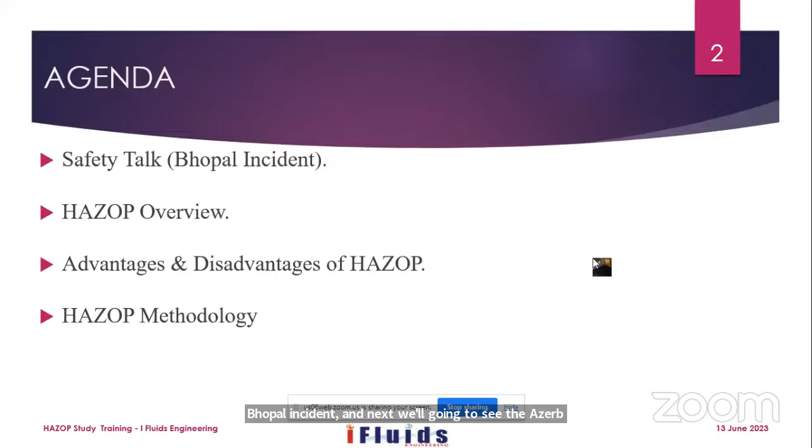Today we are going to start the Hazop session. This is the agenda for today's session. First, we will discuss the safety talk about the Bhopal incident, and next we're going to see the Hazop overview, then advantages and disadvantages of the Hazop study, and finally the Hazop methodology.

Why do we say batch process and continuous process? In the batch process for the food industry, take one reactor, say 5 meter cube or 10 meter cube, that comes under fermentation and distillation process, and it will take some time, 24 hours or 44 hours, to keep it for fermentation before preparing the next batch. So for the food industry and pharma industry, we can say it is a batch process.

For oil and gas, we take oil from the well and it is processed continuously. So these two industries, oil and gas and power plant, we can say are continuous processes. This is the main difference between batch process and continuous process.

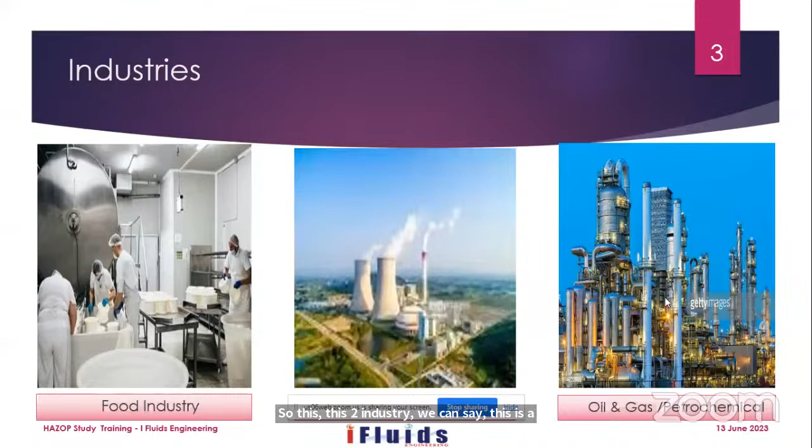This is the Bhopal incident. Hope everyone has heard about it. This is a major incident which occurred in India. The incident involved a methyl isocyanate storage tank temperature runaway. This incident occurred in Union Carbide industry. The incident type is toxic gas release, and it occurred on 3rd December 1984 in Bhopal, India.

Due to this, major fatalities occurred, around 2153, though it's not an exact value, and more than 2 lakh injuries occurred. If you want to see videos, you can search YouTube for Bhopal gas disaster afterwards; there are 3 videos you can see.

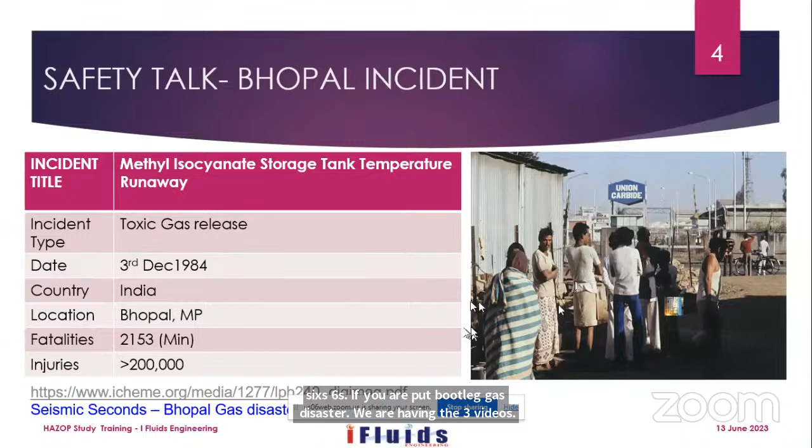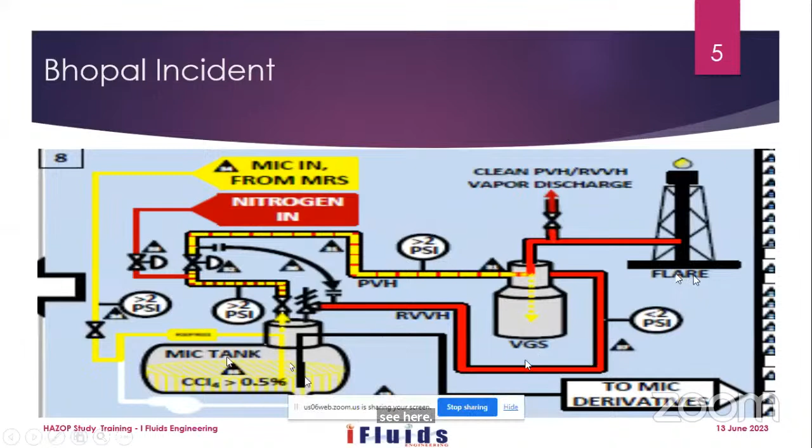This is the MIC storage tank. I will explain what happened. Carbaryl was being manufactured by reacting methylamine with phosgene to make the methyl isocyanate.

Actually, that methyl isocyanate is the intermediate product, and the final product will be the Sevin. Sevin is used for pesticides. We are using this one.

The Sevin plant, after being shut down for some time, was started again during November 1984, but was still running at far below normal capacity. Initially the plant got shut down before November, and after November 84 it had to be started at low capacity. They were started on the morning of the incident.

That exothermic reaction occurred in the nitrogen-purged stainless steel methyl isocyanate intermediate storage tank. The temperature and pressure in the tank continued to rise until 40 tons of highly toxic vapors, including methyl isocyanate and hydrogen cyanide, were released to the atmosphere via the pressure relief system.

I will explain what has happened. Okay, this is the MIC storage tank we are seeing, and this was the scrubber, the vent gas scrubber. And third, we are seeing the flare knockout drum tower.

What has happened in the incident is that because they had shut down the unit and kept it for a long time, and after the long time started the unit at low capacity, during the shutdown most of the air got contaminated in the line, and it got choked. The vent line got choked, and for dechoking the line, they flushed it.

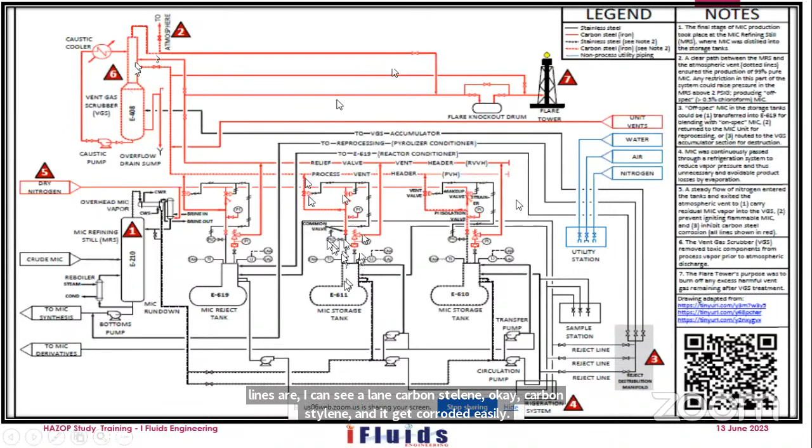What happened in the incident is that all these lines are CS lines, carbon steel lines. Carbon steel lines get corroded easily due to the methyl isocyanate vapors. Actually all these lines should be SS lines. Due to the corrosion, the pipeline got leaked.

Due to that, they kept it out of service. The scrubber should scrub whatever toxic gases come into it using caustic. We need to maintain the caustic concentration so that whatever toxic gases are there get absorbed by means of the caustic.

After absorption by the caustic in the scrubber, whatever gases remain go to the flare. What happened is that the scrubber was kept out of service, and the flare was also kept out of service. Due to that, whatever toxic gases were released did not get absorbed by the caustic, and directly by means of the PSV, those gases vented through the flare and went outside to the community.

Okay, it happened in the community. Toxic gas was released, and most of the people outside the unit got injured, and fatalities also occurred, because it was early morning, everyone was asleep, and the toxic fumes engulfed the whole area. There was no proper emergency management system maintained in this section. These are the lessons learned from this one.

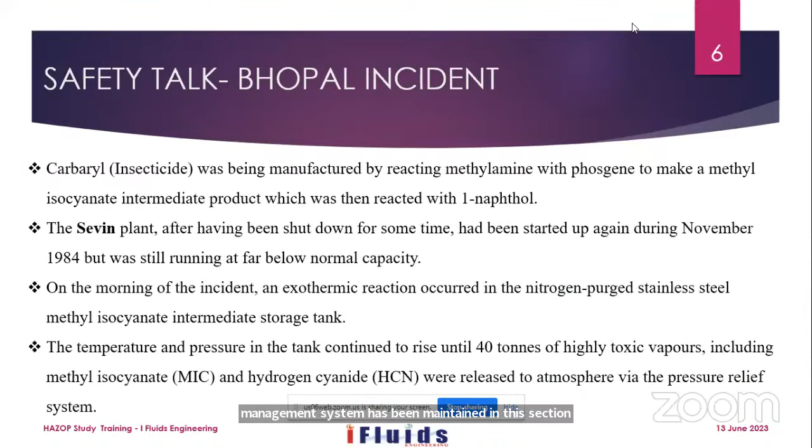Okay, what is the cause? A runaway chemical reaction caused by water ingress. As I have said, during the flushing they did not install the blind, so water got into the methyl isocyanate storage tank. Okay, next, what are the critical factors? Actually, the methyl isocyanate tank should be kept under the refrigeration system. It should be kept around 20 to 25 degrees.

But what occurred? The refrigeration system was kept out of line, so it got pressurized. The vent gas scrubber was also kept offline, and the flare stack was also not in service. The next one is MIC, methyl isocyanate was routinely pressurized out of the tank with nitrogen because the MIC tank pump was unreliable, with a seal leak. Here you are seeing this pump. Okay, this is the methyl isocyanate storage tank, and this is the pump.

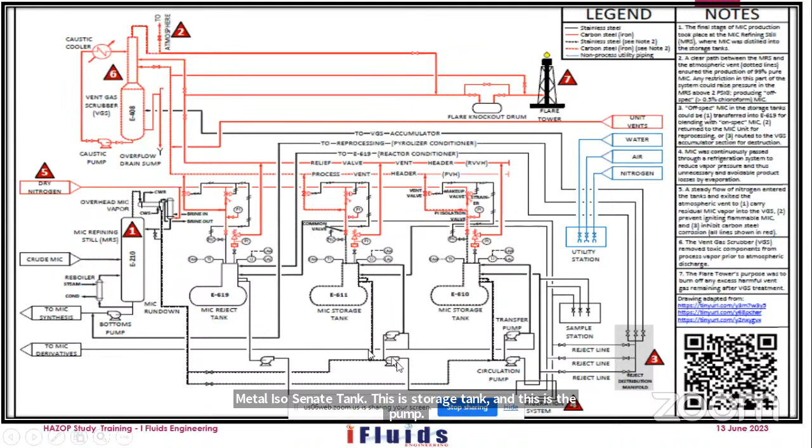What happened, this pump had a seal leak, so they were unable to transfer the methyl isocyanate to the process. Incoming methyl isocyanate was coming continuously, and water got into the storage tank. An exothermic reaction occurred, so the methyl isocyanate tank got pressurized. Actually, this PCV has to control the pressure and vent through the scrubber, but this line got choked.

So the next action was taken by the PSV, and the PSV popped, and the scrubber was also out of line. Whatever toxic gases were released were not combusted, because the flare was not in line, so all the toxic gases engulfed the community. The carbon steel vent header, as I told, was routinely flushed with water to clear the fouling deposit.

Another factor: the tank high temperature alarm was disconnected when the refrigeration system was taken out of service. During that time, they kept the high temperature alarm disconnected. If the high temperature alarm had been connected, they would get the alarm in the panel so that the operator could take action immediately. Next, the emergency water spray was only capable of knocking down the vapor cloud at lower elevation.

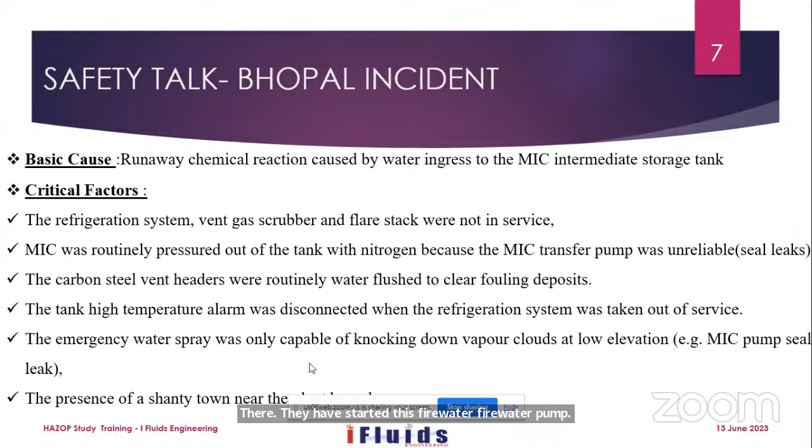During the toxic gas release, they started the firewater pump, but it was unable to reach the top location. Then there was the presence of a town nearby. And what is the main root cause? Inadequate preventive maintenance, inadequate risk assessment. Because the plant was not running continuously, they kept it shut down for a prolonged period, and after that they did not do a proper HAZOP study.

The HAZOP study was not conducted. If they had conducted the HAZOP study thoroughly before starting the plant, or conducted a PSSR, this could have been avoided. Okay, and inadequate management of change, inadequate training. As I said, the plant operator was viewing the pressure gauge, and it was showing the actual pressure of 50 kg per centimeter square. But the panel operator was not confident in that reading. He thought the pressure gauge was malfunctioning. If he had been confident something was going wrong in the process, it could have been avoided.

And inadequate leadership; emergency response planning was not proper. In case of leakage, there should be emergency response planning. Medical support, the fire water system and ambulance should all be kept ready so that we can reduce the incident rate.

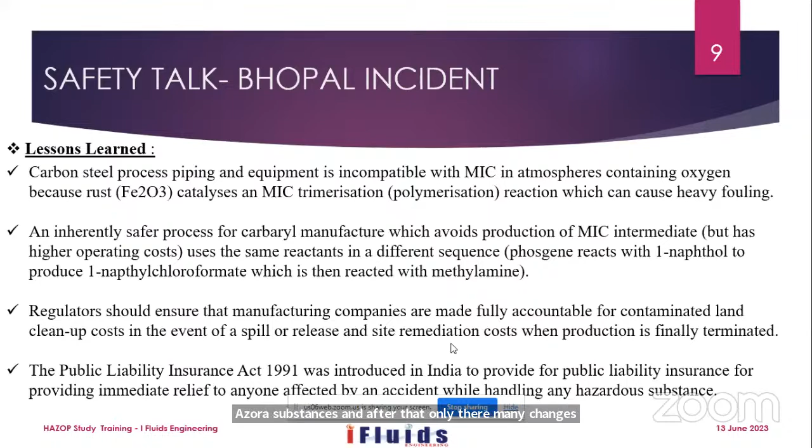This is the process. And what are the main root causes of the incident? The slip blind was not installed. If they had installed the slip blind in the MIC tank, the water would not have entered the tank. That is the first one. The second is that the pressure gauge reading was ignored. Actually the pressure gauge was showing the correct reading, but it was ignored. And then for temperature measurement, a temperature gauge was not provided.

The tank got pressurized due to the entry of water and the exothermic reaction. Due to the exothermic reaction the temperature increased, and even though the temperature increased, the cooling system was kept offline; the refrigeration system was also kept offline. If the refrigeration had been on line, the temperature would have been maintained. And the vent gas scrubber was in maintenance, and the flare was in maintenance. That's about the Bhopal incident.

Next we are going to the training topic, the origin of HAZOP. HAZOP is hazard and operability study. It was initially prepared by Dr. H.G. Lawley and associates of ICI at Wilton in the 1960s, and subsequently C.J. Bullock and A.J.D. Jennings from the Chemical Engineering Department, Teesside Polytechnic, under the supervision of Kletz, applied the method at a higher institution.

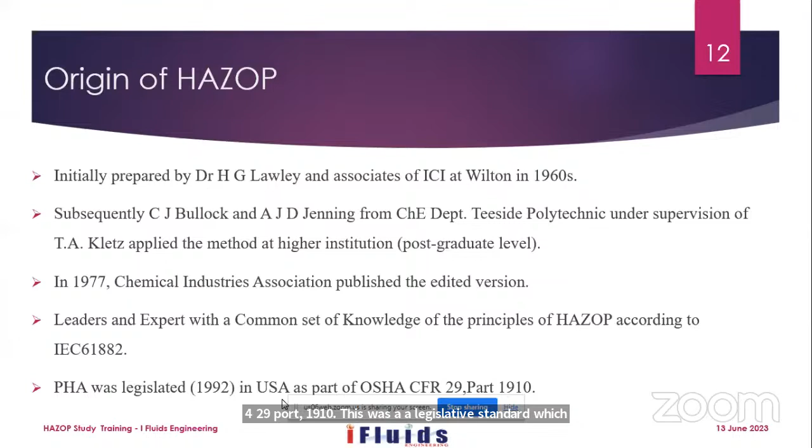Generally, process hazard analysis can be done by means of different methods. HAZOP is one of the methods for doing hazard analysis. These are the various methods we can use to identify hazards: first is what-if analysis, second is the checklist, third is HAZOP, fourth is event tree analysis, and then failure mode and effects analysis and fault tree analysis. First is the what-if analysis.

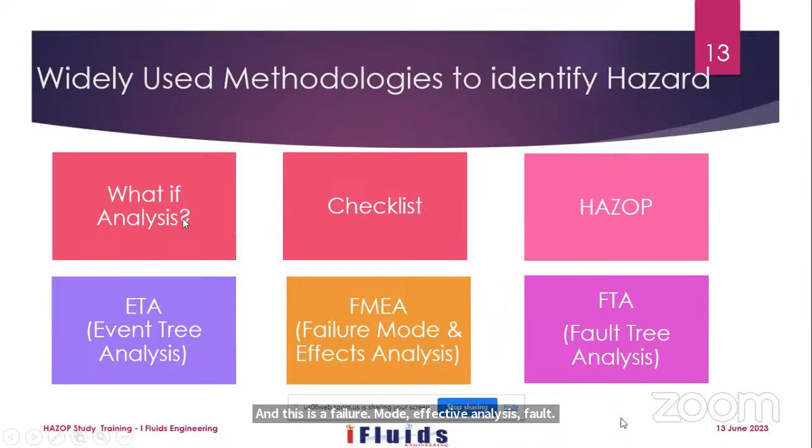What-if can be used at any time for new and existing facilities. This requires an experienced team and adequate preparation. What-if analysis uses a brainstorming session. Suppose in a process amine is stored in a tank, and by means of the pump we circulate that amine to the absorber, and after the absorber the amine comes back to the tank. By means of what-if analysis we can ask: what if the pump stopped?

What if the tank leaks? What if the alarm is not established? What if the line leaks? These are the questions we can raise. In the brainstorming, the team will be drawn from different departments like operations, maintenance, safety, and instrumentation.

So by means of this brainstorming we can analyze the result. So that is the what if method. We can say what if analysis uses a creative team brainstorming, what if questioning approach to the examination of the process or operation to identify the potential hazards and their consequences. We have to identify the hazard and the consequences.

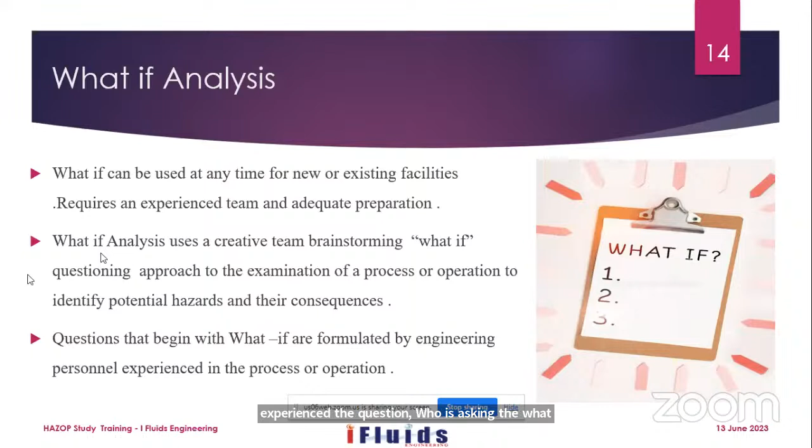And the questions that begin with what if are formulated by experienced engineering personnel. The person who is asking the what if should have a thorough knowledge about the process and the operation. And what if questions, for example, for the piping, we can say what if the piping leaks? Okay.

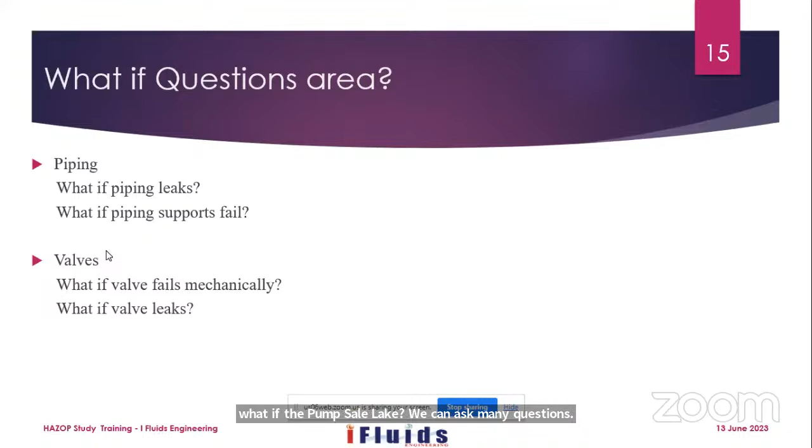Suppose you are saying what if the piping leaks, suppose in the pipeline some hydrocarbon or gas is moving, we have to identify what are the causes for the pipe leak and what are the consequences, and whatever the risk ranking, we need to identify it. And next we can say what if the piping support fails? If we take any component, if we take a pump, what if the pump seal leaks? We can ask many questions. By means of the questionnaire we need to identify the hazards in the unit. This is a what if study.

And then next is the checklist analysis. In the checklist analysis, creative questioning augments the systematic experience-based checklist, providing a more complete study that can be used successfully at any stage in the facility life cycle. This checklist can be used at any stage to identify and evaluate the most common hazards in the process. This checklist we can do at any time, after the FEED stage.

After the FEED stage, if we are doing the shutdown of the plant and again we are going to start the plant, we can do that in the checklist. The checklist has been prepared by the experienced engineers before starting of the unit. This checklist study we can do in the middle of the time or before starting of the plant. Anytime we can do it. For example, here one general checklist study is there. Here the serial number will be there and the category will be different.

Does blowout hazard adequately addressed? Are there any methods of eliminating or controlling the hazard? The response here is by the loss prevention team, who is responsible for this one. Suppose in the category, flange bolts got properly tightened or not, that response will be done by the mechanical engineer. That mechanical engineer will check as per the checklist and write the comment whether the action point is open or closed. Okay, this is the checklist method.

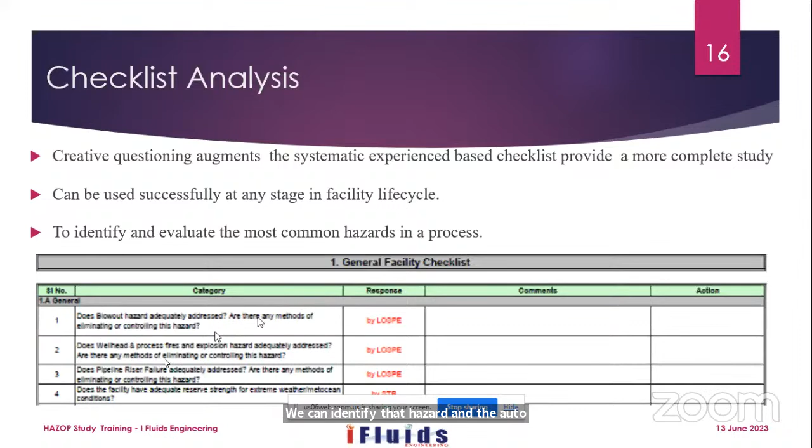And there are the different departments. By means of the checklist, we can identify the hazard and we have to rectify it. This is about the checklist analysis. And the next is failure mode and effects analysis. Failure mode and effects analysis is done for a specific component. Suppose you are taking the compressor or the pump, in the pump, suppose the seal got leaked. Suppose you are taking the compressor, the instrument transmitter will be there.

In case of failure of the instrument transmitter, what will be the effect occurring in the industry? That is the study. That's the failure mode and effects analysis. This study is particularly done for a single component in the major equipment, analyzing the specific system or items of equipment that are best handled as objects rather than by use of parameters or operation. Analyzing the pumps, compressors, and items of equipment having interactive mechanical or electrical components. Okay.

FMEA, failure mode effect analysis, considers in a systematic and rigorous manner all of the possible single failure modes of the individual plant item. We need to consider the single failure. Suppose a seal leaks from one component, and another standby pump also has a seal leak; that we can't consider. Only one pump single failure has to be considered for this FMEA study.

And the analysis is usually carried out by a small team who should have detailed knowledge of the equipment. FMECA is failure mode effect and criticality analysis. The criticality of the consequence we need to identify, and the frequency is also addressed and recorded. This is about the FMEA study.

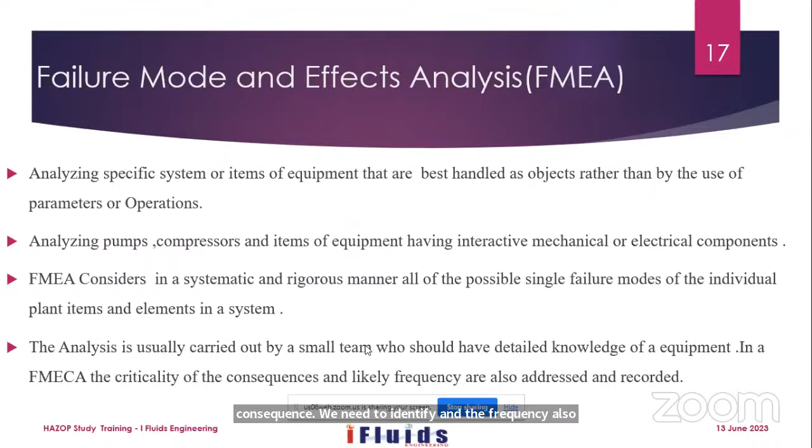And this is the overall PHA, process hazard analysis study. These are the differences between HAZOP, what if, FMEA, FTA, the fault tree analysis, and ETA, the event tree analysis study. These are the different studies. HAZOP study is done by the deviation, and further on we will see what the deviation is. And what if checklist is done by means of the checklist; I have shown the checklist.

And FMEA is done by the component; for any component leak in the system, we need to study the specific component, that's FMEA. Fault tree is by loss event. In case a tank overflow has happened, what is the reason for the overflow? The causes are what we study in the fault tree analysis. In the event tree analysis, after the leak has occurred, whatever consequence occurs on the downstream side is what we study.

After the event occurred, we do the analysis: what protections are there? That is the event tree analysis. Fault tree: before the event occurred, what faults occurred? That is studied by means of fault tree analysis. HAZOP is best for process operations, what if is best for relatively standard operations, FMEA is best for mechanical and electrical systems, FTA is best for complex systems, and event tree analysis to study one or a few causes.

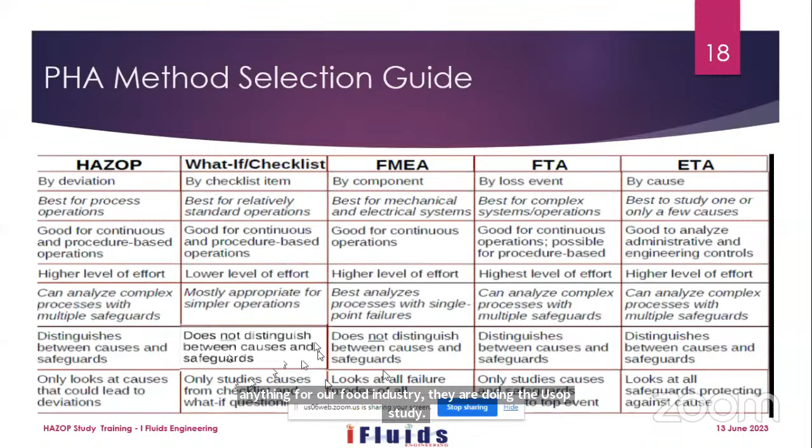And if safety is expensive, why should we invest in safety? Why think safety is expensive? Because without safety we can't run the plant. In case any incident happens in the industry, it will affect the people, environment, asset, and reputation. First is the people. In case of injury to people, the company image will get degraded. So we need to check for this. Safety is the main priority in our unit: people.

And we are seeing the environment. In case of any toxic gas release, it will affect the environment. In case of H2S release, some of the people, if they inhale that H2S gas, will faint and get injured.

And next is asset. Suppose in the plant you don't have a trained operator for DCS operation or in the field, what will happen? In case of any emergency, you need to open or close the valve in time, within 5 minutes or something. If it is not opened or closed, it may lead to damage of the compressor. Suppose in the compressor discharge one valve suddenly gets closed, the compressor will get damaged, and it will lead to injury of nearby people. That is asset.

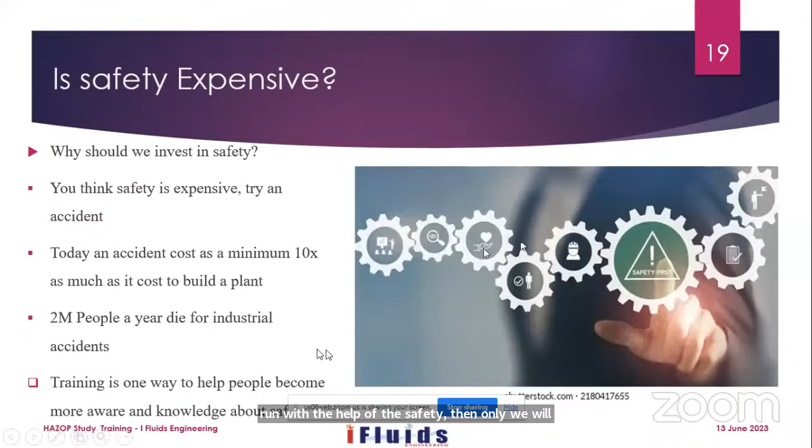Safety has to run with the process. This is the wheel; it has to run with the help of safety, then only we will achieve the top. Training is one of the ways to help people become more aware and knowledgeable about safety.

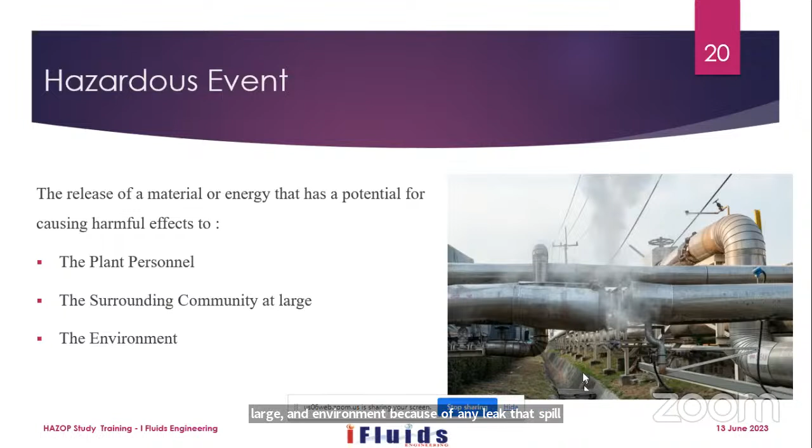Hazardous event. What is a hazardous event? The release of material or energy that has a potential for causing harmful effects to personnel, surroundings and the environment. You are watching the pipeline; this is a steam leak in the plant. In case of a major leak, any personnel near that area will get affected by the leak. In case of a major rupture, the leak will spread to the community at large and the environment. In case of spillage of chemical or anything, it will go to the environment and affect it. These are the three main things.

And what are the main hazards in the plant? As we see, there are many industries: food industry, chemical industry, oil and gas, and pharma industries.

Different hazards are occurring in the industry. This is a common hazard we can see in all industries. First is fire, explosion and toxic release.

Fire - in case of fire, we have different types: flash fire, jet fire, pool fire and secondary fire.

The second is explosion. Explosion will be caused by means of any abnormal chemical reaction occurring in the tank or something. Due to the pressure, it gets ruptured and explosion occurs. First is the chemical explosion, next is the physical explosion, next is the vapor cloud explosion.

And the third is toxic release. Toxic release means in case of H2S or SO2 release, that will affect the personnel. So that is toxic release. These are the major hazards in any industry.

What is BLEVE? Boiling liquid, expanding vapor, explosion. In the tank, liquid will get boiled, and it will get evaporated, and it will overflow from the tank. That is BLEVE - boiling liquid, evaporating vapor, explosion. That is occurring in the liquid.

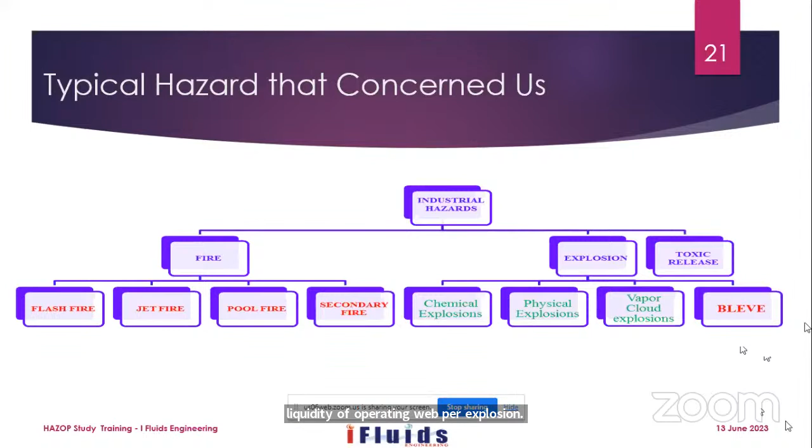We want to know the risk terminology. In industries we generally use many terms, so we need to know about risk terminology. BLEVE is an explosion caused by liquid which is boiling and continuously producing flammable vapor.

Next is combustible. What is combustible? Combustible is a property of a substance that will burn as a result of fire and chemical reaction. Next, what is explosion? The explosion is a rapid expansion in volume associated with the extreme outward release of energy that usually comes with the generation of high temperatures.

And this is flash point. What's the flash point? Flash point is the minimum temperature at which the liquid gives off vapor within a test vessel, in sufficient concentration to form an ignitable mixture with the air near the surface of the liquid.

If you look here, here is LEL - lower explosion limit. And here UEL means upper explosion limit.

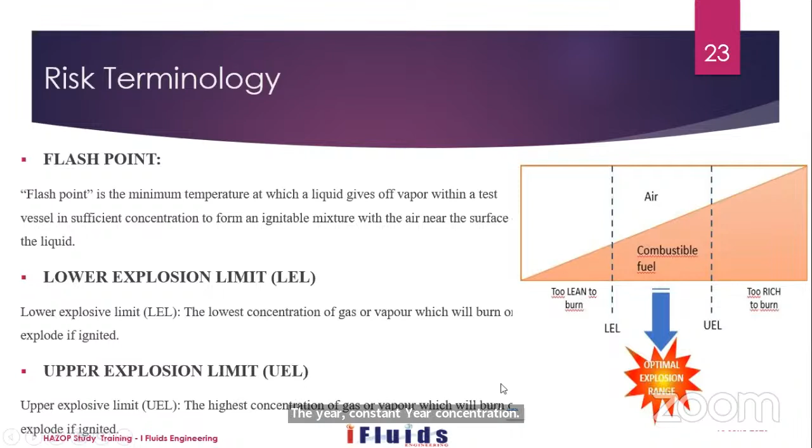Hazard and operability study - when to apply the HAZOP study? HAZOP study can be applied during the feed stage. Suppose if you want to commission the plant, that concept initially we call the conceptual stage. In the conceptual stage, they will study whatever the plant needs, what equipment is to be done, and what costs will be involved for the plant - that and all will be studied in the conceptual study.

After the conceptual study, detail engineering will be done. After the detail engineering, they finalize the P&ID, process and instrumentation diagram. After finalization of the P&ID, then we can do the HAZOP study for the plant. In this stage we can do the HAZOP study, or in case of any modification done in the plant.

Suppose if you are running the sulfur unit at 50 tons, or 100 tons per day you are producing, and need to modify to 150 tons per day. During that modification, we require the pump capacity to be increased, line sizing to be increased. So before the modification we need to do the HAZOP study. At that time we need HAZOP study.

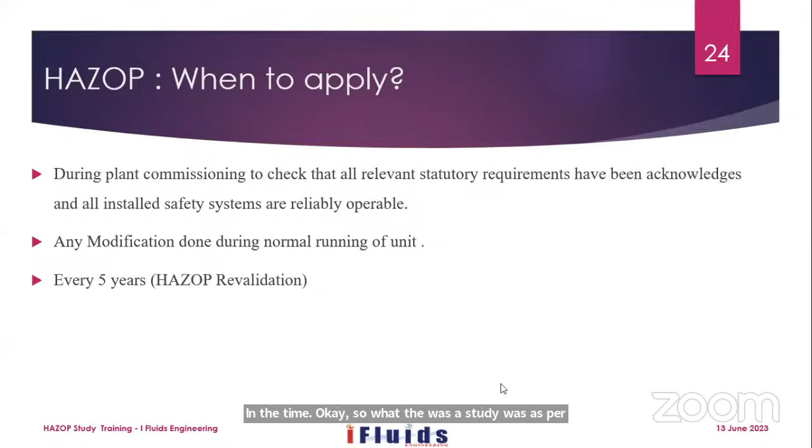And next, suppose the plant is running continuously, many changes will occur in the alarm study, or modification has been done over time. So as per OSHA, every 5 years we need to do HAZOP revalidation for the unit.

And what are the advantages of the Hazop study? The range of expertise and experience create a wide information pool base for decision making, and representatives from different cultural groups in a facility can bring value, because Hazop study is done by multiple engineering disciplines. So we get a clear picture and different ideas during the study, and groups can make higher quality decisions because they have a greater combined capacity to comprehend the problem's complexity and its alternative solutions.

And disadvantages of the Hazop study: we can see time pressure, because if the plant has 50 P&IDs, and someone says only 5 days are there to complete the Hazop study, then time pressure will be there during the study.

And then ego pressure, because in the Hazop study multiple disciplines will be there. One will say this safeguard we can take, another discipline will say no, we can't take this as a safeguard - that's the ego pressure that will be there.

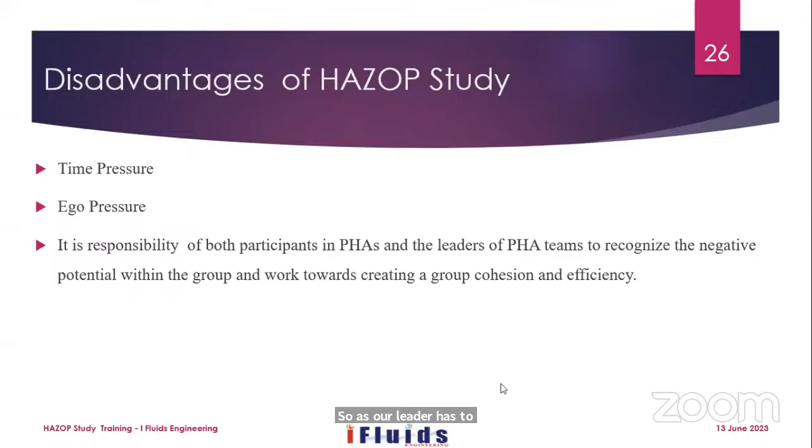It is the responsibility of both participants in the PHA and leaders of the PHA team to recognize the negative potential within the group and work towards creating group cohesion and efficiency, because multiple teams are there and all will throw out ideas. So the Hazop leader has to control the session and take it in a positive way.

Qualitative and quantitative - what is the main difference between the qualitative and quantitative study? In the qualitative study we say things without numbers, suppose high hazard, low hazard, medium hazard - that comes under the qualitative study. If you are saying it by means of numbers, that is a quantitative study.

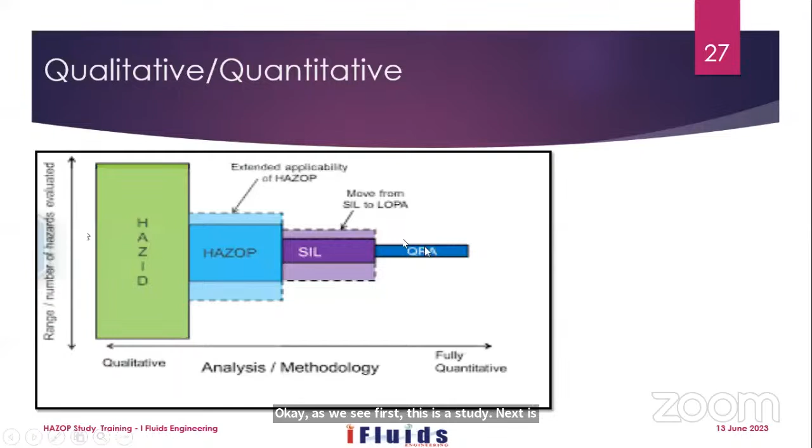Suppose if you are saying quantitative study, we can say QRA - QRA is fully quantitative, 100% quantitative study. And if you are saying the SIL study, we can say that is semi-quantitative. Hazop study we can say is semi-quantitative. HAZID study is qualitative study. So as we see, first is the HAZID study, next is the Hazop study, next is the SIL study, and this is the QRA study. QRA is the fully quantitative study method.

We are going into the Hazop study methodology. In the Hazop study methodology, we have 6 steps. First is the node - what is the node?

Node is one - node is the section. We can say it's the section because when you look at the plant, from the battery limit the process will be coming into the tank. From the tank, we are pumping into the distillation column, and after the distillation column it's going to the scrubber, and after the scrubber it's going to the final product. So different sections will be there. So we need to mark up the node in the P&ID - which section we are going to do the Hazop on. Different nodes, by means of different colors, we need to mark up in the process and instrumentation diagram.

And after the marking, we need to define the deviation. What is the deviation? Deviation is the combination of guide word and parameter - that is the deviation. We can say guide word as no, less, more. The parameter is the main parameter we are doing in the Hazop study - flow, temperature, pressure, level. These are the 4 main parameters. Apart from this, many parameters are there, and we are going to cover those too.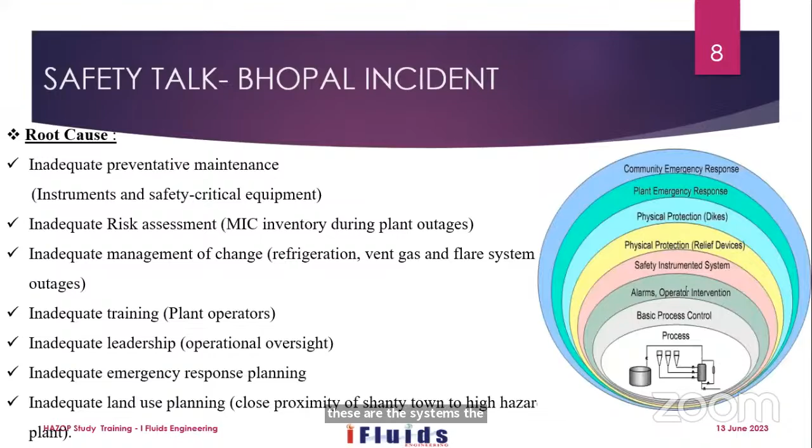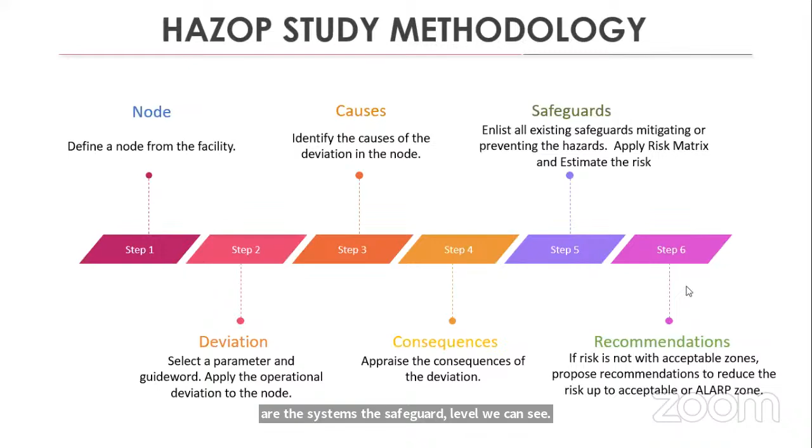So these are the safeguards, and finally we have to give the recommendations in the Hazop. Okay, first, in the Hazop study we need to identify the design intent. What is design intent? Design intent is a description of how the process is expected to behave at a node. This is qualitatively described as an activity or quantitatively in the process parameters.

If you are taking one plant, one tank is there, a pump is there, and the tank is pumping to the absorber or regenerator. We have to write the design intent. We have to write that water is pumping from the tank at a temperature of 20 degrees centigrade and a pressure of 4 kg per centimeter square to the absorber. That is the design intent of the node. We need to specifically mention the temperature, pressure, and what is intended to do. That is the design intent.

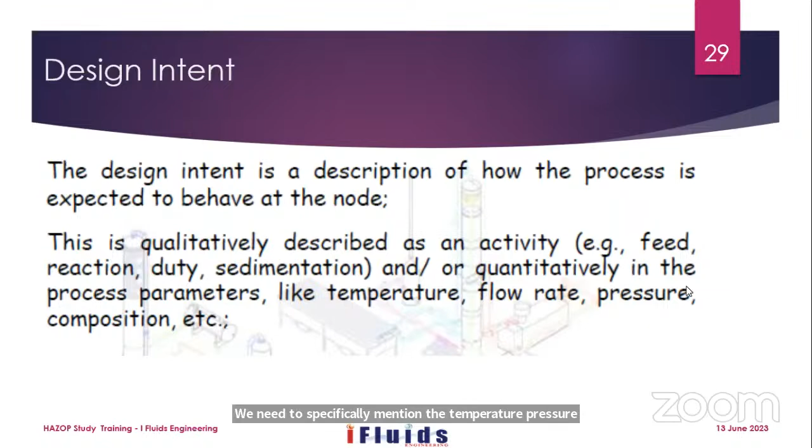Okay, and what is the deviation? Deviation is the way in which the process condition may depart from the design intent. In the Hazop study, we are not challenging the design. One thing we need to understand is that before starting the Hazop study, we need to imagine that the plant is running normally and all the safety systems are working properly. We are not challenging the design in the Hazop session. We are only identifying the deviation: what hazards will occur in case a deviation occurs in the plant. That only we are going to study in the Hazop session.

We are not going to challenge the design. We are not saying this plant is not designed for 25 tons per day or something. We can't say that the PSV is not designed for that respective tank. We are only identifying whether the safeguard is there or not. In case any safeguard is not available, we are providing a recommendation. We are not challenging the design in the Hazop study. A deviation is the way in which the process condition may depart from the design intent.

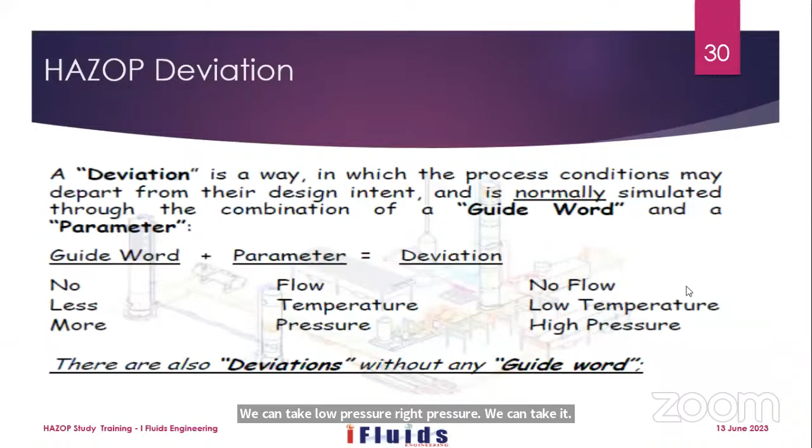Yes, these are the deviations we can see. In case of the parameter, this is the flow. If you are taking flow as the parameter, the design intent we have is 20 to 60 meter cube. The minimum is 20, and the maximum we can go up to is 60 meter cube. That is what they mean by 20 to 60 meter cube. And the guide word will be the guide word.

More means more flow, and less means less flow. We can say no flow or reverse flow. For the flow we can take four deviations. More flow means, we can say, above 60 is more flow.

In case of more flow, what will happen? In case of less flow, what will happen? No flow means zero flow, and reverse flow means it's a negative flow. It's a reverse flow.

In case of the temperature, for the design intent we have to mention the operating temperature, 120 to 140 degrees, and the deviations are high temperature and lower temperature. As I said, no means not having any, so we should not take no as a deviation.

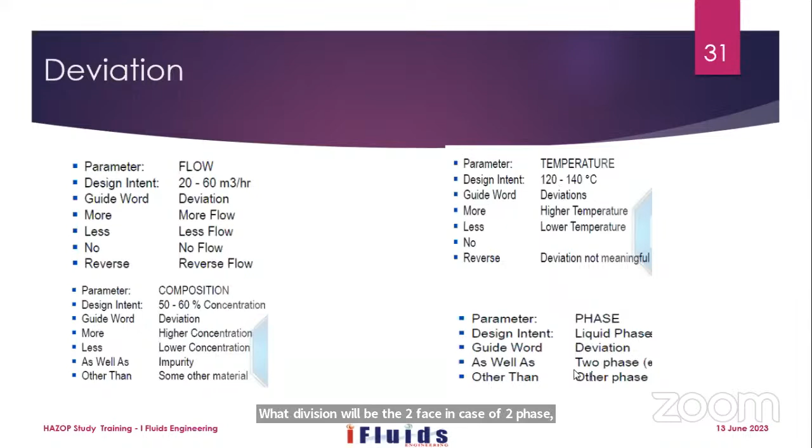In the phase we can say liquid phase. The guide word deviation will be two phase. In case of two-phase flow, what will happen? In case of other phase, what will happen? These are the deviations we can consider.

What is a parameter? A parameter is a term through which the design intent, the allowable range for a design intent, can be characterized or specified. HAZOP parameters can generally be classified into parameters related to input medium properties, parameters related to input medium conditions, parameters related to system dynamics or mechanical state, and non-physical tangible parameters related to batch.

These are the parameters we can take: flow, pressure, temperature, mixing, stirring. Mixing and stirring will mostly come in the batch process, where we can say mixing, stirring, transferring and all. Normally in the HAZOP, the main parameters are flow, pressure, temperature, and level, and viscosity based on the liquid we are carrying.

Reactions: in the batch process, reactions will be occurring. Composition we can take. Addition means addition of any chemical. Separation, time, because the batch process runs based upon time. We can say the batch should run 10 hours. In case it runs 11 hours, the batch time has increased. What will happen? That we can study.

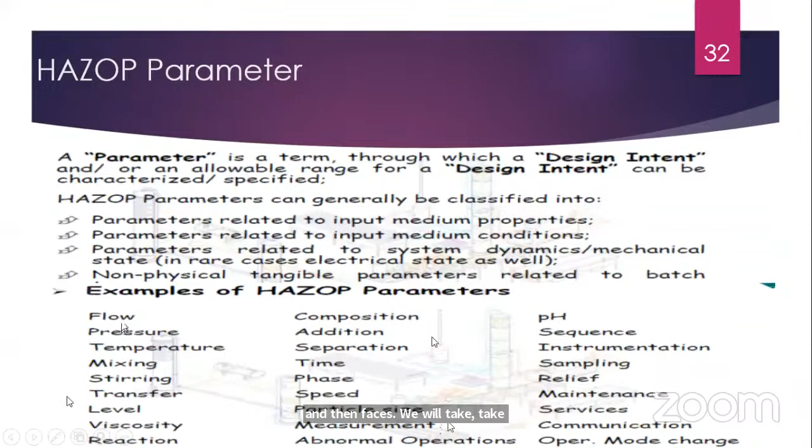And the guide word, we can say no. If you say no, it's completely stopped. Suppose I am saying no flow: the pump has stopped, so no flow.

That is a deviation. Okay, in case of more flow or less flow, we can say suppose that in the pump suction a strainer will be there. The strainer has got choked, so less flow is occurring. Then we can say it. Suppose in the suction you are having a control valve, and that control valve has opened suddenly, then more flow will be coming.

Okay, this is the example for no flow, less flow, more flow. No flow means completely stopped. On tripping of the pump, we will get no flow. Okay, more flow: suppose the pump discharge control valve is there for controlling the flow. If the discharge control valve, the level control valve, opens suddenly, then we can say more flow. Okay, in case of less flow, the control valve gets malfunctioned and it has got closed, means there's less flow, we can say. Reverse flow is opposite of the design intent.

Okay, suppose in case of a pressure difference or any upsets suddenly occurring in the operating plant, there may be chances of the flow coming from the pump discharge to the suction of the pump, so that is why the NRV, non-return valve, is installed in the discharge pipeline. Okay, reverse flow as well you can take.

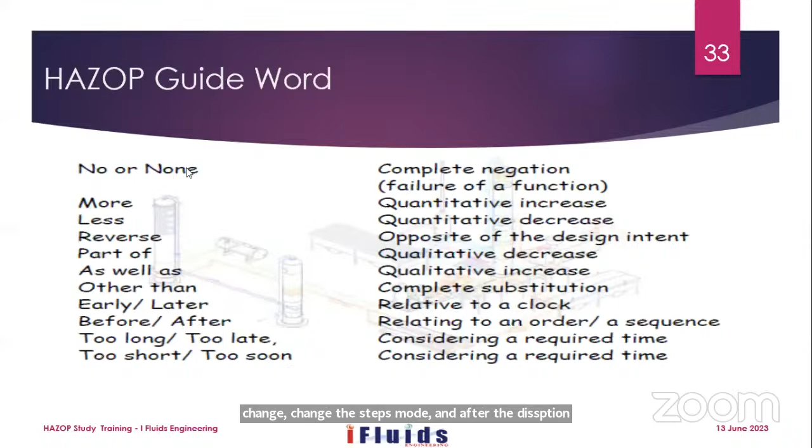And these are the main rules for identification. The cause, whatever cause we are taking, should be in the same node. We can't take a cause from another node for the study. The cause has to be taken only from the identified node, whichever node we have marked. Okay, a cause is something which logically or physically belongs to that node, to the specified section marked on the P&ID released for HAZOP. Whatever you have marked in that P&ID respective node, only from that node we need to identify the causes. And then the consequence can be anywhere, can be everywhere.

It will go outside of the node also, because in the process we are having different sections. One will be absorption, desorption will be there. In case in that absorption any valve has got closed, in the next section, suppose desorption, the consequence will be occurring in that next section. So we can write the consequences in the first node itself.

When you are considering the consequences, we should not consider the safeguards. Okay, whatever the final consequences, we need to consider and write them, without safeguards. Okay, and single jeopardy is applied for identifying the cause. Common mode failures are considered as a single jeopardy. Okay, single jeopardy means

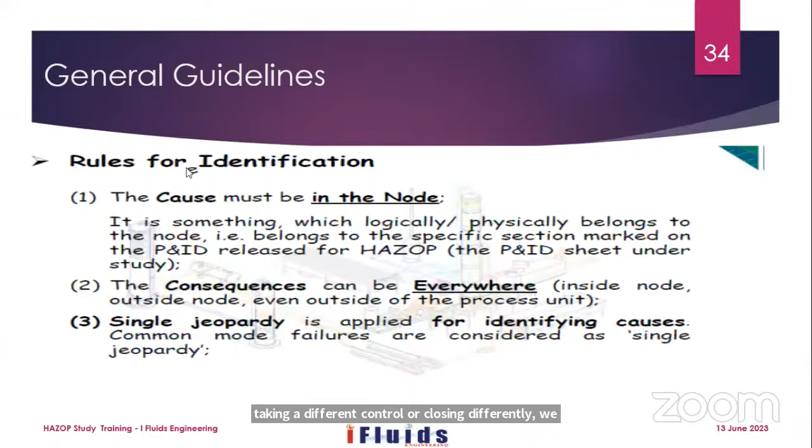Before starting the Hazop study, we require the process flow diagram and the process and instrumentation diagram. A process description should be there, and we need to review all the documents in detail, PFD and P&ID. After receiving the documents for the particular unit, we need to mark the different sections in the P&ID. If you are taking one P&ID, there will be different nodes, 3 or 4 nodes. We need to mark the nodes in the P&ID.

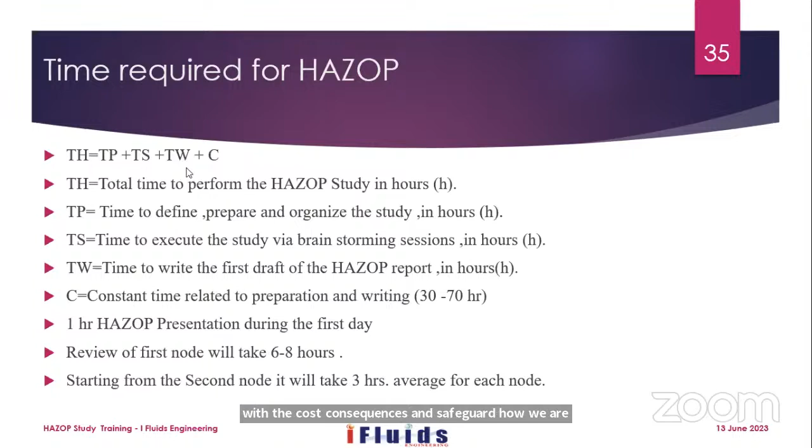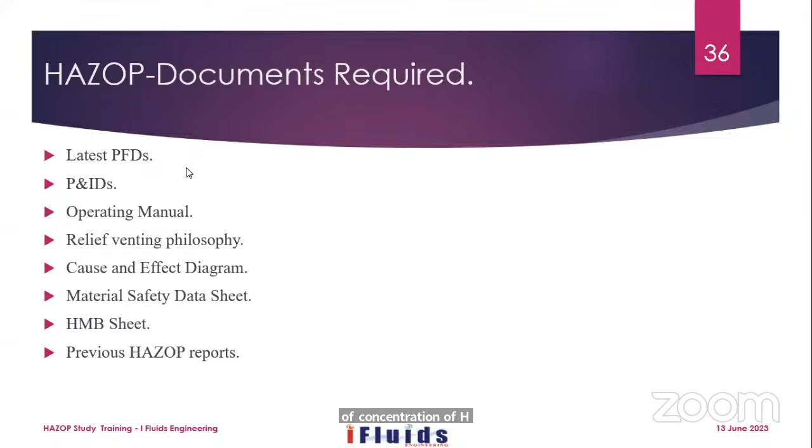These are the documents required for the Hazop study: the latest PFD, process flow diagram, process and instrumentation diagram, operating manual, relief venting philosophy, cause and effect diagram, material safety data sheet, and HMB, meaning heat and mass balance sheet, because we need to know how much the flow is and what the concentration of H2S or other material is. We need to check that from the heat and mass balance sheet.

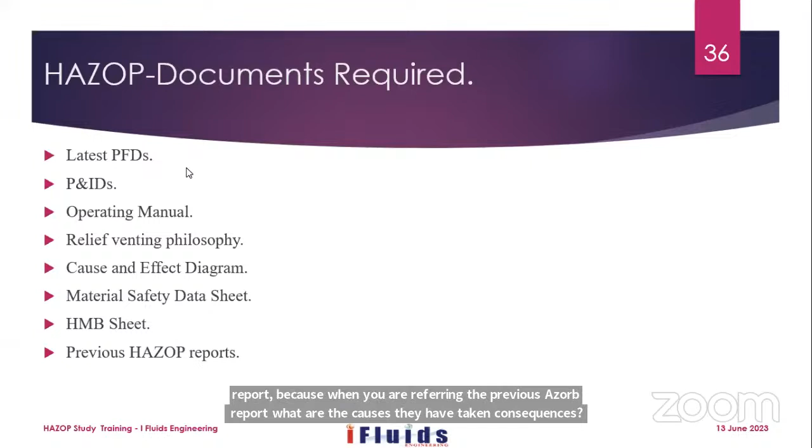We need to know the previous Hazop report. Suppose you are putting up a new plant; there will not be any previous Hazop report, so we should not ask for it. We need to do a fresh Hazop after the FEED study. If you are conducting the revalidation every 5 years, we can refer to the previous Hazop report, to see what causes and consequences they have taken, when doing the new revalidation Hazop.

We are giving recommendations in the Hazop study. Some won't accept the recommendations of the Hazop study; then we have to write it down and write the reason for rejecting the recommendation, because whatever is identified in the Hazop session will be there as a document.

And the safety information contained in the Hazop report should be shared with all employees and contractors. Whatever Hazop study we have done in detail should be shared with all employees in the plant, from top level executives to panel operators, because they need to study the report and check what safeguards are there and what recommendations we have given. They need to know about the hazard analysis scenarios.

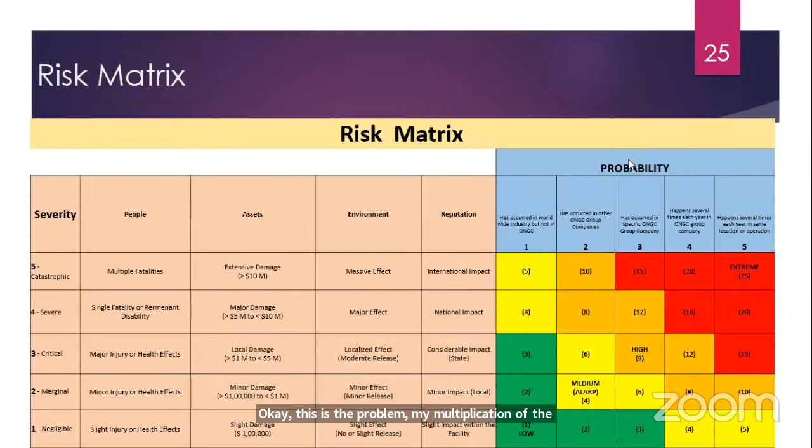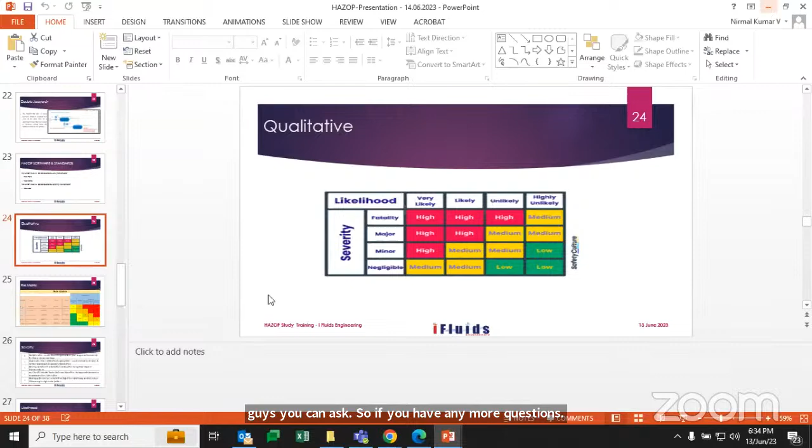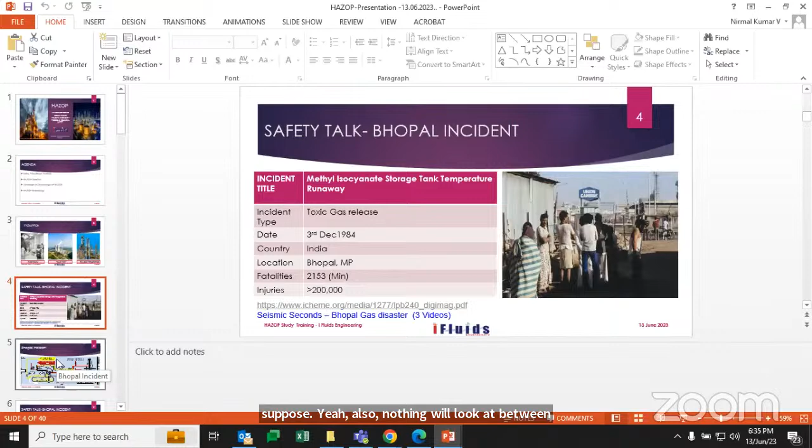So you're explaining about LEL, UEL, right sir? So suppose you're choosing any component, in order for it to explode, should it be in between the LEL and UEL, or beyond the LEL, UEL? It should be between the LEL and UEL, then only it will occur. If it is less than LEL, nothing will occur. Suppose above UEL also, nothing will occur. Between that, in case oxygen gets contacted, then it will get exploded. So if it is beyond UEL, will it be assumed that we'll be having excess of fuel in terms of oxygen, sir? Yes, because in case of UEL, nothing will happen. Suppose if you are taking the tank, toxic tank, inside the tank UEL will be there.

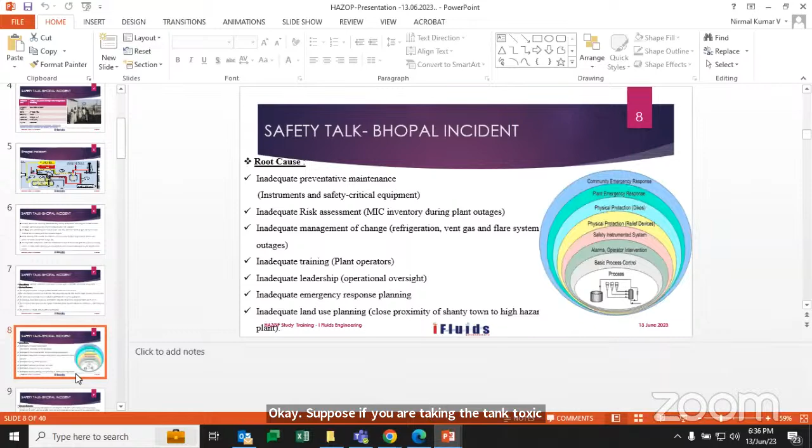Sir, Aravind Mahadevan is asking about HAZOP analysis. In HAZOP analysis, we are analyzing the hazard, that is HAZOP analysis, we can say, analyzing the hazard.